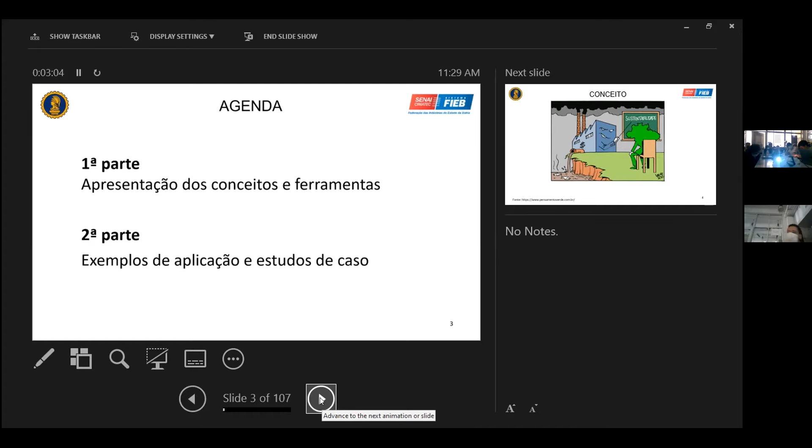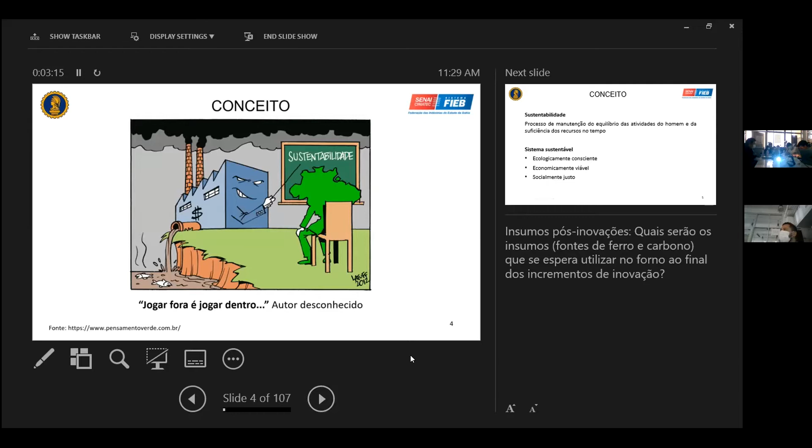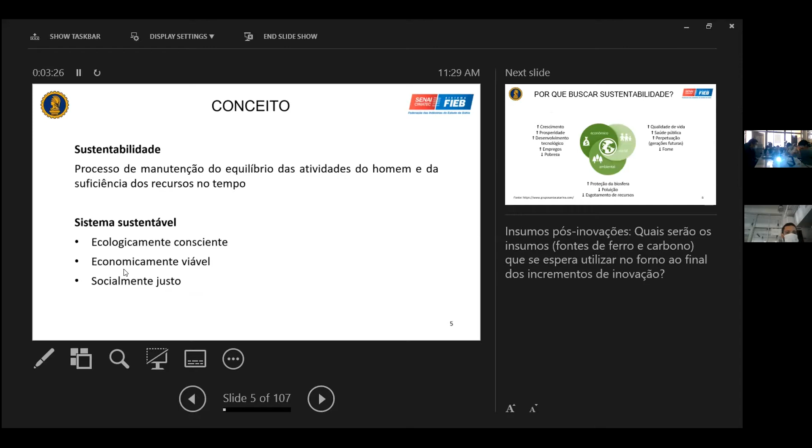What is sustainability? Environmental sustainability. Throwing things out means throwing things in, because we just have this planet. That sort of talk that you guys know. What is a sustainable system? It would be ecologically conscious, economically viable, and socially just.

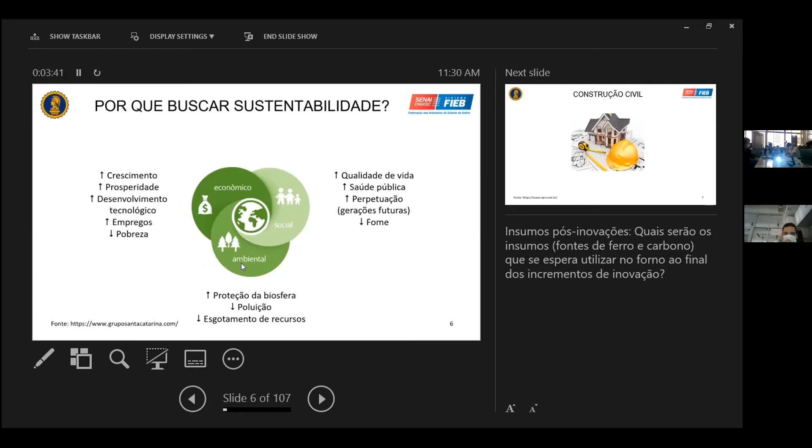Why do we look for sustainability in buildings? We have the three sides: this one here is the economic, this one here is the social, this one here is the environment. I'm not going to stay here for too long. For civil construction and civil engineering, we can have benefits on the prosperity of the society, development.

Sometimes I will pause a little bit because I'm trying to translate what I have here. Generating a place for people to work, enhance quality of life, public health, and decrease the number of hungry people, and protecting the biosphere. And what is this other one? Pollution and resource scarcity. We play an important role here, and we should think about that, because we don't do that naturally to the positive side. We do to the negative side. So we should think about this a little bit.

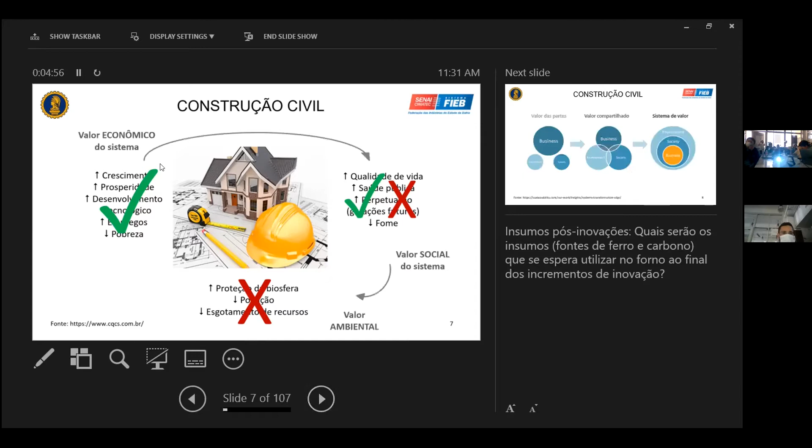So this is really good for the economic side. For the social side, we have some things that are positive, some things that are not that positive. And for the environment, most of the time we are not doing the best thing. So we should think about that. That's this big X here. So the economic value is here, the social value is here, the environmental value is here.

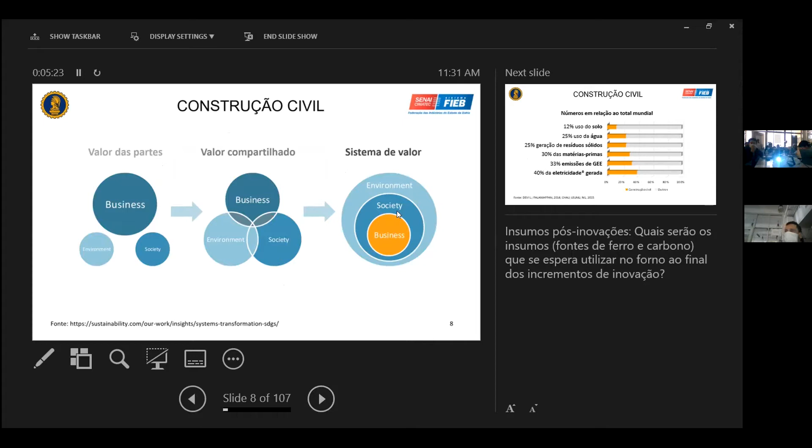And which is very important, we think about that because the concept of sustainability has been evolving, and nowadays we think like this: without us, which means society, we don't have business. If we don't have people, we don't have business. And if we don't have environment, we don't have anything. So actually, we are within it, so we need to care for it.

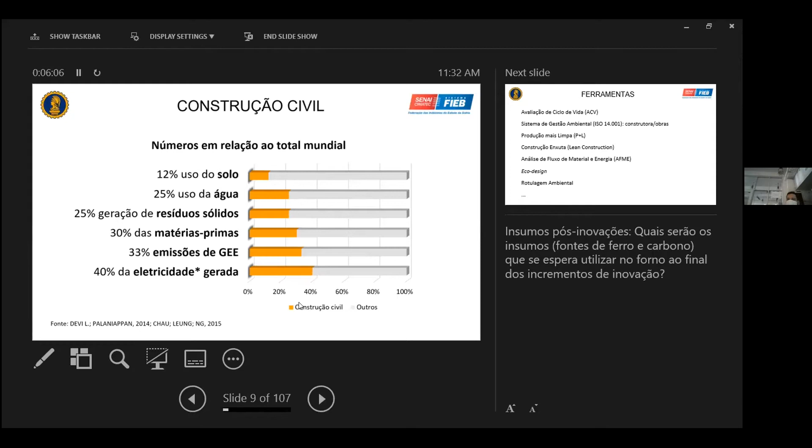A little bit about the major impacts of civil engineering. We use 12% of the soil in the world for anthropic activities - anthropic means made by human. 25% of the water, 25% of the waste generation is due to what we do. 30% of the use of resources, feedstock, and raw materials, 33% of greenhouse gas emissions, and 40% of the electricity generated. This is just us, and there are other sectors: agriculture, transport, energy, everything.

Some of the tools: life cycle assessment for us to try and analyze and manage this part of the engineering. This is a Brazilian standard here, but we have equivalents here in the US. One concept called cleaner production, lean construction - you guys probably have heard of it, but we are going to touch a little bit about it. Material and energy flow analysis, eco design. This one here, probably - anyways, those are the labels that we have in products, green labels. This is pretty much, I think, the translation.

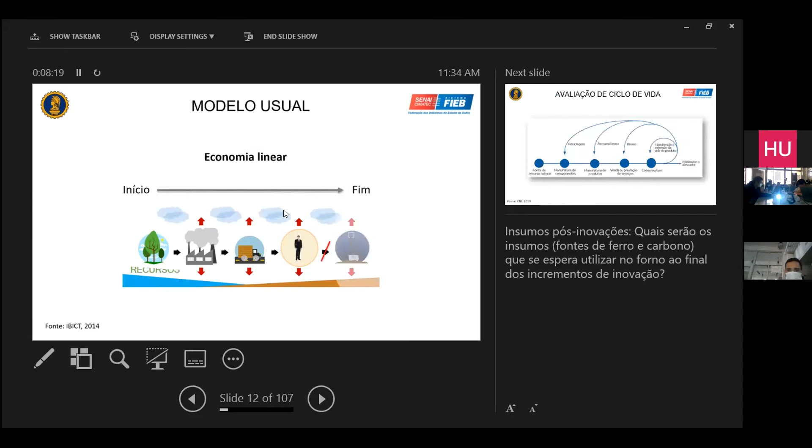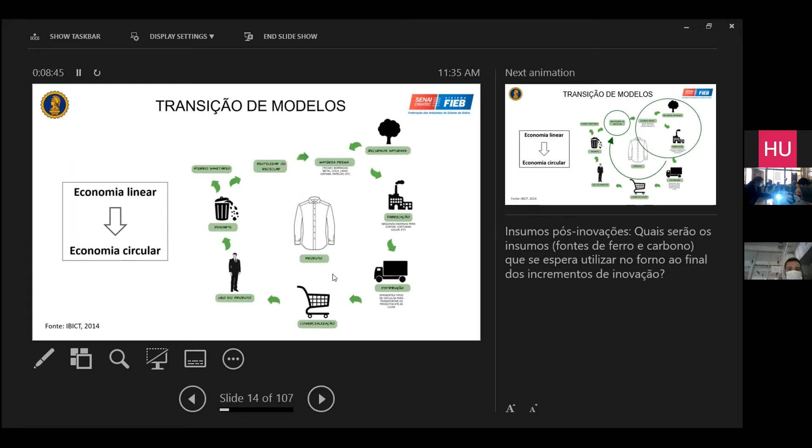So what we try to do here is circulate the economy more than think in a linear way. So recycling, remanufacturing, reuse, and all those sorts of things. Instead of doing this kind of circle and ending in the landfills, we try to keep the nutrients, the substances, materials going on in cycles. That's the main goal now. So yeah, this is the circular economy.

This symbol here is the institution where I did my master's degree back in Brazil.

Okay, so from the perspective of life cycle assessment, and I can help you guys a lot with this because it's sort of my background. So we have environmental aspects, which are the causes. It's not gonna be only about concepts, okay? We are going to jump to examples in a bit.

The causes are mining, agriculture, forest exploitation, production of electricity, water, transport, constructions, everything. This causes environmental impacts, which are the first consequences. So depletion of natural resources, pollution, and changing the land use, okay?

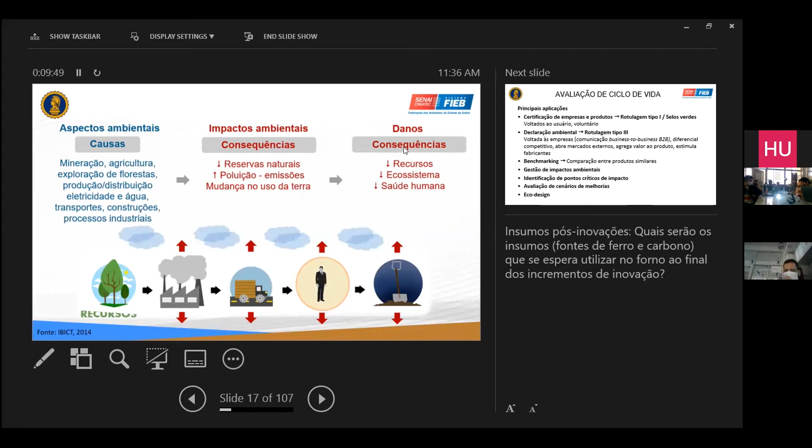And the consequence of the consequence, we call this damage. So first impact, in the second place, damage. Damage are - we are worried about the resources, the ecosystem, and human health, okay? This is like the framework of the life cycle assessment.

The same as we have in those products here that we can take in our hands. Probably we'll have some labels if it's plastic, saying that it's recyclable, saying that it's sustainable in some way. We have certifications for buildings. And this one is pretty known, right? LEED, LEED. Have you guys heard of LEED? We have many buildings here at UCLA that have the LEED certificate.

This indicates the degree of sustainability of edifications, of buildings, sorry. This certificate was created here in the US, but we have this being applied all around the world, including Brazil.

And we have like the normal, the silver, the gold, and the platinum kind of certificate. So these levels differ in how environmentally sustainable the building is. And what's our product? Our product is buildings and other types of construction, so including infrastructure.

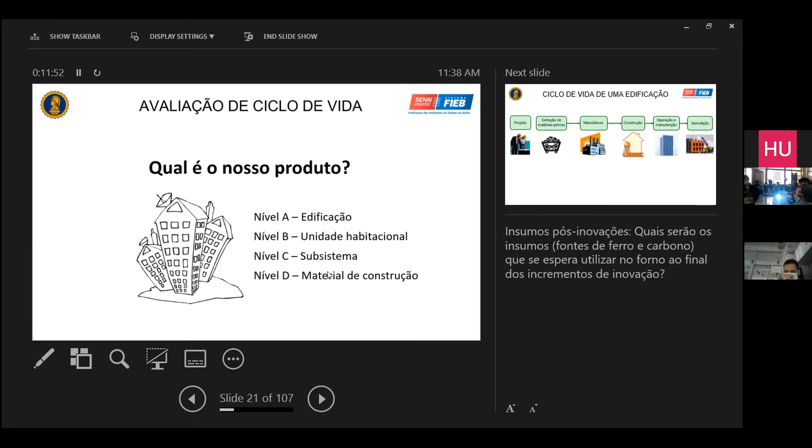And all the way through materials. So we can think of concrete, we can think of glass, we can think of everything. We can assess them from the environmental point of view. Okay, applying the general LCA, discretizing a system in stages, applying this to buildings.

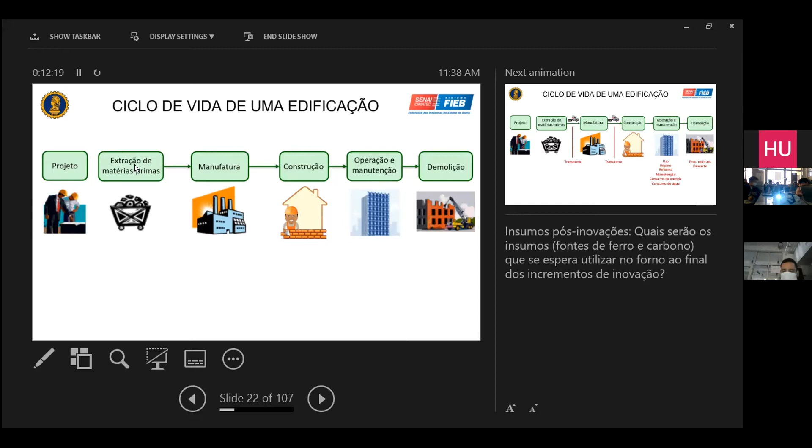So we'll have here the design, the project and the design, and then the extraction of feedstock and raw materials. It won't necessarily be in time, like chronologically before we extract. It's being extracted now, we are designing now, so it's gonna be merging somewhere. But yeah, the idea flow is like this.

Actually water we can kind of consume because we pollute it. And demolition, okay? So processing of residues and waste and try to recycle whatever we can. So this is conceptual phase, production phase, construction phase, use phase, and end of life.

If you have any questions, just interrupt me. I'm trying to go fast because we have a lot to cover, and I don't want to be here talking for 2 hours for you guys. I mean, I want to listen to you and discuss with you.

Okay, the engineering design versus eco design. So what is the goal of eco design?

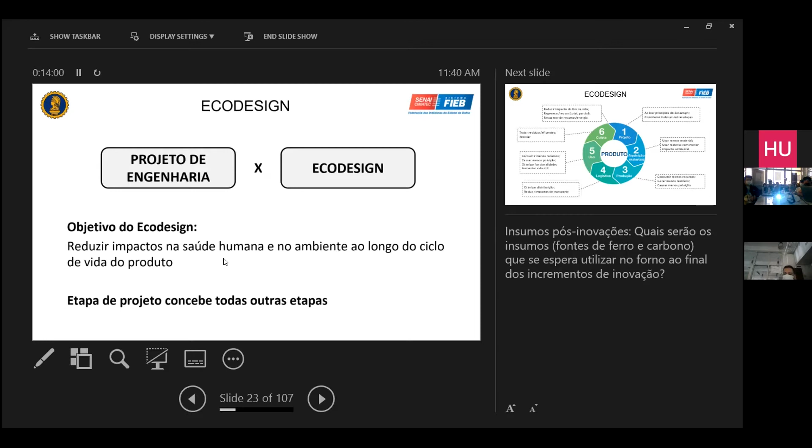It's like reducing environmental impacts and impacts for human health along the life cycle of a product, okay? And the design phase thinks about every other stage in the life cycle. Let's try to understand this circle here: design first, getting the materials, production, logistics (transport and everything), use, and end of life.

So we want to apply the principles of eco design here in the project phase and consider all the other stages. We have to think about them, because if we don't think about the end of life of the product, it's going to just end up in the landfill. I mean, that's the best case if we don't think about it, but probably it can go to the sea. We have this huge problem now that plastics are all around the ocean, right?

For the materials, we should use less material and use material that has lower impact. In production, use less resources to produce - so production efficiency, generate less waste and cause less pollution. In logistics, optimize the distribution and think of the impacts of transport - the closer we are from the source and from the user, the better. Use less resource here in the use phase, cause less pollution, optimize functionality, and enhance the service life. And treat residues, recycle in the end of the day, and try not to send everything to the landfill, okay?

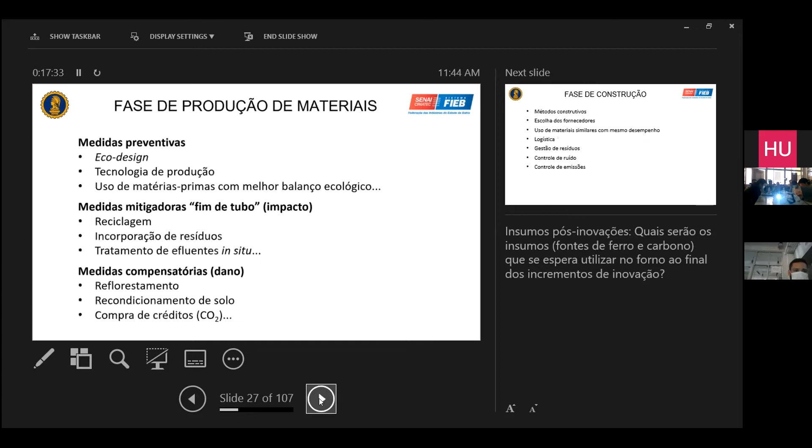So I got a question - aren't there a lot of constraints with rainwater reuse, with rainwater treatment, for a residence? How feasible do you think that would be to implement in our design project? Yeah, I think it's perfectly feasible.

One thing we need to do first in the design is separate the plumbing system - we cannot mix what comes out of the toilet with the gray water. So yellow water is water with urine, black or brown water would be water with the other thing. Gray water will be water from faucets and sinks, not including the kitchen, because in the kitchen we have organic matter, fatty acids, and all sorts of things. So we really want water from the sinks, water from the showers, and from laundry machines.

So first of all, we need to separate those, and then we can apply it. There are some pathways, some different designs we can apply, but mostly for a basic treatment, we want to use them for non-potable uses inside the building. For potable uses, we actually need drinking water, and to get from gray water to drinking water, it's better if we rely on the public system than try to do it at a small scale.

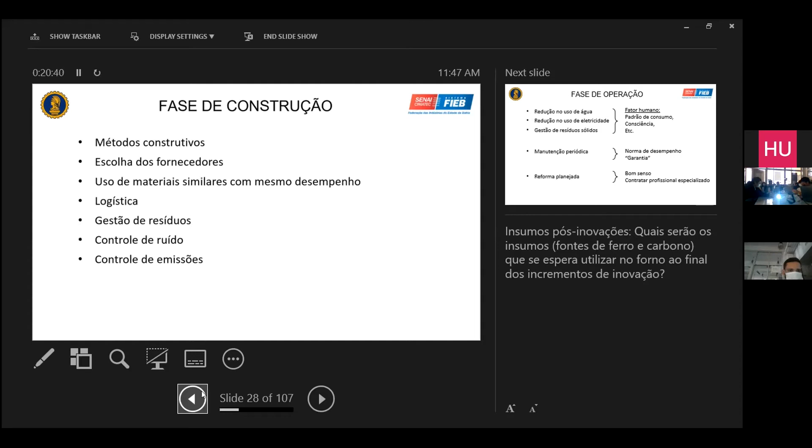Okay, lots of concepts here. Let's go. So how much do you guys know about recycling, upcycling, and downcycling? Does anyone want to try and provide us with a concept in a very concise way?

So I'd say recycling is just kind of straight up reuse for its original purpose or function. Upcycling is repurposing and almost upgrading it to something a little bit different, a higher level. And downcycling would be taking whatever product that is and breaking it down into its most basic materials or components to reuse it.

Yes, pretty much. In the sense of the origin of the word, it means repeating the cycle, and we aim to reduce the environmental impact. The one thing to keep in mind is whenever we recycle a material, it will start accumulating impurities.

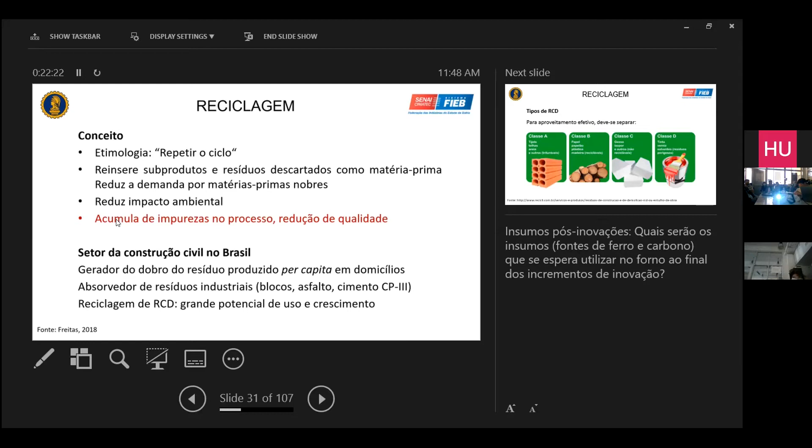So in the sense of repeating the cycle, probably for some applications, even for the same application—which means recycling—you probably need to invest some energy in processing because of the impurities accumulation. And as he said, upcycling tries to use something for a higher level function, while downcycling is using something that was once noble for a more commonly used material. So here I bring some examples.

If we have an old aircraft, we have two applications here: we can either use this steel to store food, or to produce a brand new Airbus airplane. So is this recycling, downcycling, or upcycling? Are those two options, taking steel from here...

The first one's downcycling, the second one's just recycling. But Airbus is never going to use recycled metal in their products, mainly because it loses the properties that are very important for this application.

For engineering, speaking about civil engineering construction materials—if you don't know yet, I'll tell you now—the whole industry relies on us to store their waste. There are millions or billions of research papers and theses focusing on how to store this kind of industrial waste in the concrete matrix, or in the ceramic matrix, or in pavements. So lots of industries rely on us to do that.

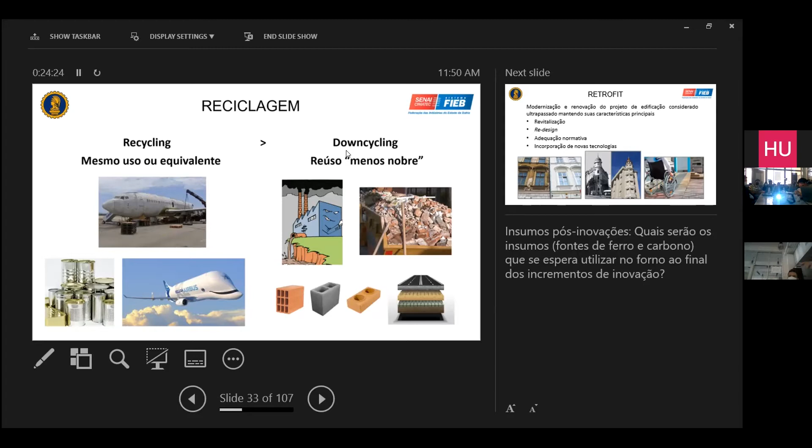So this is pretty much downcycling, because they're using some sort of material that had a purpose and now it's just immobilized in our walls. Anyway, this is only another way to look at it.

Retrofit means redesigning old things—refurbishing inside, incorporating new technologies, adapting for standards to be accessible. For example, if we have a construction made 50 years ago, the standards changed; now we are more worried about accessibility, so we could use retrofit to fit this kind of function in the facades, etc.

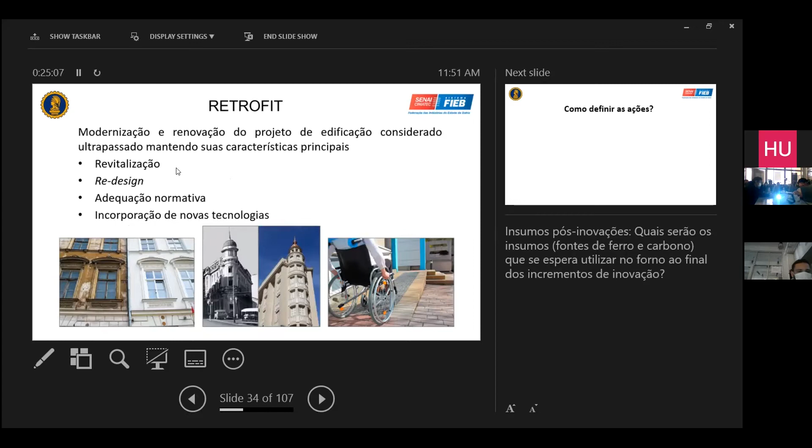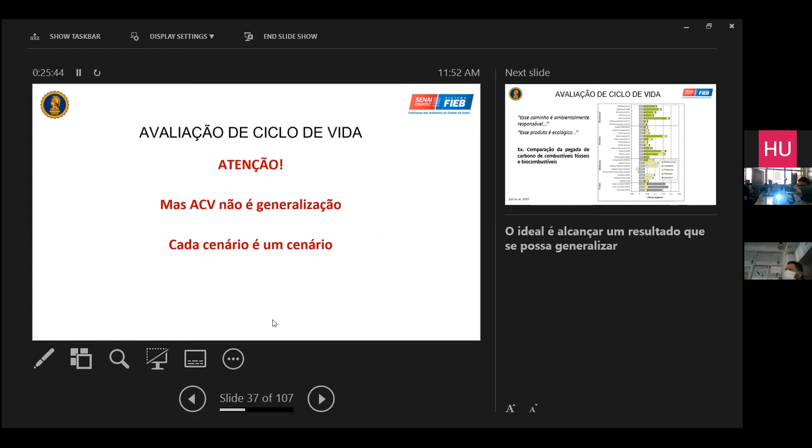So just so you know some of those concepts, one heads up: life cycle assessment is not a generalization, it's all about one scenario. If you do an assessment of a product here, it probably won't be valid for that same product being produced in Japan—the industry is different, the energy matrix is different, everything is different. So I don't mean to generalize here; we need to keep in mind that this is regarding some specific context or application.

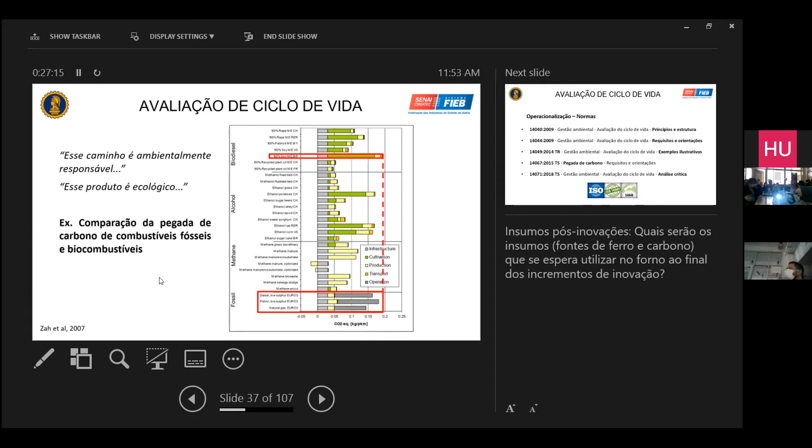Provocative diagram here. If I ask you, are biofuels more or less sustainable than fossil fuels for cars, for example? Probably everybody would say biofuels, right? But we have an example here that biodiesel from Brazil, from 100% soybean, has a greater carbon footprint than all the major fossil fuels in Europe. This is because of how we treat the soil in this kind of system. By changing the soil use, we are not capturing as much greenhouse gas from the atmosphere, and instead of keeping the cycle, we are just emitting. So this is accounted in the carbon footprint. In this study from about 15 years ago, our biodiesel actually has a higher carbon footprint than fossil fuels. This is only a provocation to say that not everything we think is sustainable is going to be sustainable. We actually need to calculate it, okay?

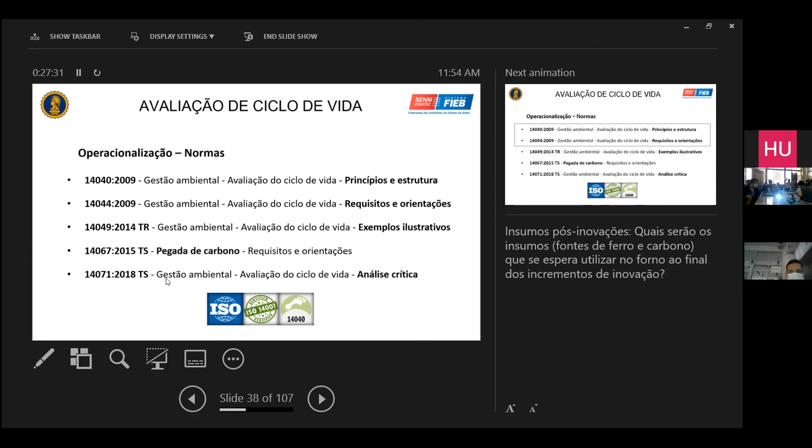These are some of the ISO standards for life cycle assessment, 14040, 14044 are the main ones, and many others. We have software to do those kinds of calculations. I know pretty well how to use SimaPro, but in my PhD I'm going to be using OpenLCA. This presentation is written in Portuguese, but if you guys want it, I can just email you. I don't really mind. I see Gavin here taking notes, but you'll have it if you want, I just don't have time now to translate it, though it's pretty easy to translate. If you have any questions, just reach out to me.

We actually have some life cycle assessment software for civil engineering for buildings: Athena Sustainable Materials, OneClick, eTool, Energy Plus. We have access to OneClick and Energy Plus through the Solar Decathlon competition. And this one, OpenLCA, is open source software, so it's all free and we can do coding if we know how. The United States Department of Energy also has a database.

So to do LCA, we need mostly one thing, which is data. Probably someone already did all the data gathering and analysis, for example, for the production of 1 kilowatt hour of electricity, so we're not doing that ourselves. If we wanted to do that, we'd spend like 30 years to do one life cycle assessment. So we rely on data that's already there. The database for our life cycle assessment is the most important thing, and the Department of Energy has its own database that we can use in OpenLCA. Probably by next year at most, I'll be dealing with this for my research group here, but I already kind of know how to do it.

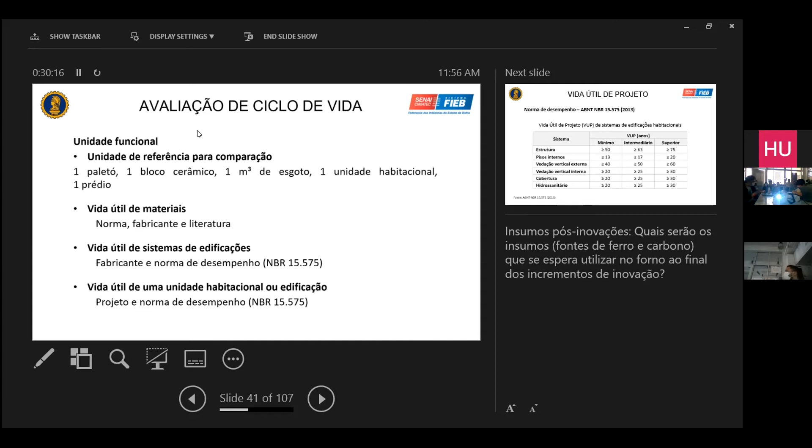To do life cycle assessment, we need a functional unit, as we say, 1 kilowatt hour, 1 kilo of concrete, one something. On the basis of this one something, we calculate everything else.

Some of the important impact categories in life cycle assessment are carbon footprint, and footprint meaning this kind of footmark, which carries the meaning that the thing you did before, that you don't see, you don't look back at, but it's there. So carbon footprint is CO2 equivalents. Does anyone know why equivalent? Because of other gases, yeah, pretty much. For each environmental category we have one environmental mechanism. Climate change is all about the greenhouse effect, and other greenhouse gas molecules behave differently compared to CO2. For example, regarding this environmental mechanism, one molecule of methane means like 25 to 30 molecules of CO2, so we can convert all greenhouse gas emissions into CO2 equivalents. Some greenhouse gases mean like 30,000 molecules of CO2. It really depends, but the main one is CO2, probably the second is methane, and we have a huge list of others.

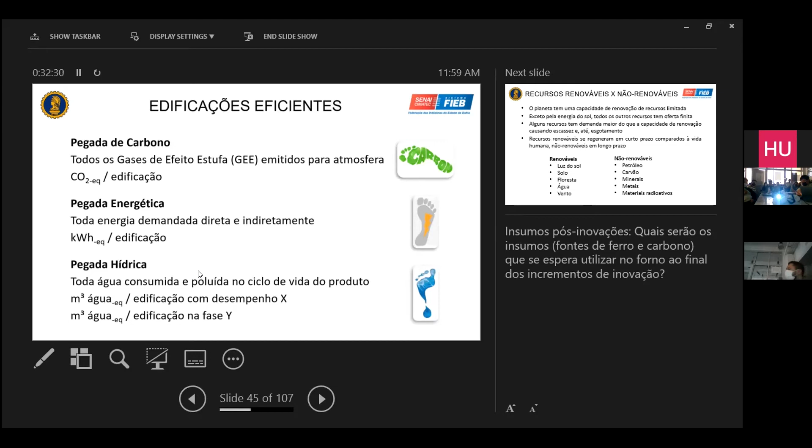Another quick question, and then we'll reach the examples. What is renewable and non-renewable? Anyone? Renewable means you can continue to do it indefinitely. Yeah, what else?

So it's pretty much the capacity of the earth to renew a resource. Renewable means it could be considered indefinite, like infinite. The sun will end eventually, in millions or billions of years, I'm not a physicist, but compared to our span of life, it's pretty much infinite, right? And fossil fuels are not.

We have a limited amount of fossil fuels, and it would take millions of years for the earth to produce them again. But with trees and the water cycle, they are pretty much renewable because as we go, the cycles run and they get renewed. So that's the difference: the capability of renewability compared to our span of life.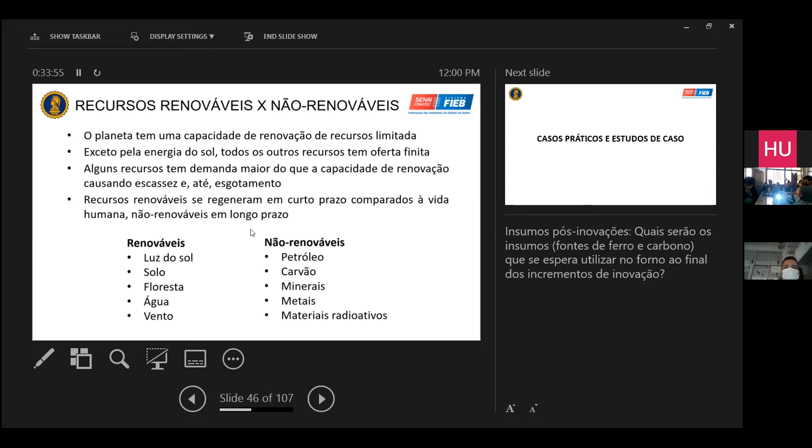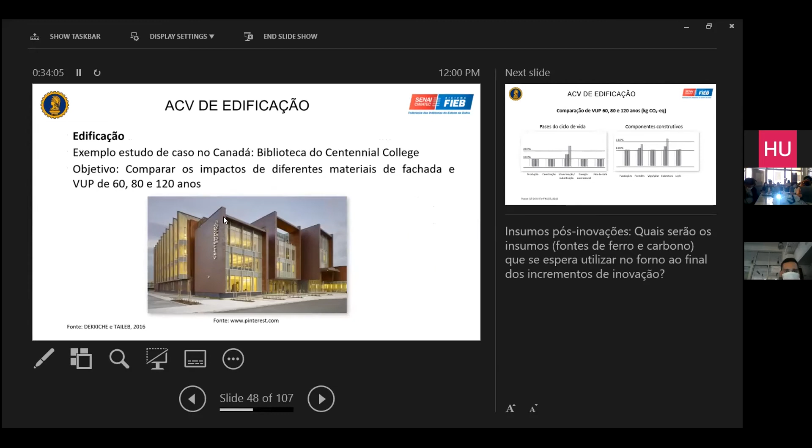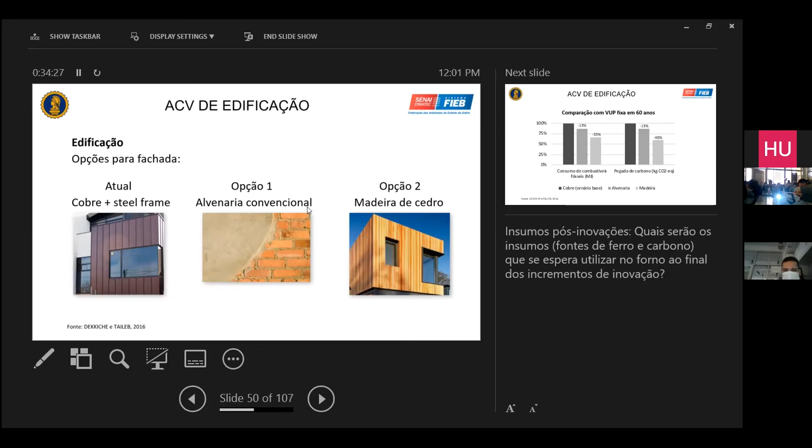Some examples here: these guys used LCA to evaluate this building, a library at a university in Canada. Their facade is made of copper and a steel frame, and they compared it to conventional masonry—what we call in Brazil ceramics and plaster—and another option, wood. They found that the fuel consumption and carbon footprint were lower for those alternatives.

This is pretty much what I said: when you have a trade-off between using this or that, we can try to use LCA to come up with an answer, on the environmental side.

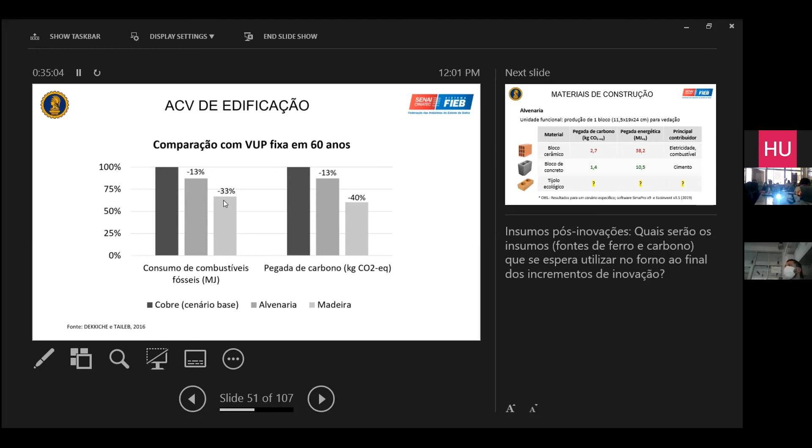One thing we cannot forget is cost. Engineering is all about cost—it's the first aspect we see, so we cannot forget about that. If it's too expensive, people won't do it unless we have standards and laws forcing us. Otherwise, we won't do it.

This is a study I have going on, and I'll probably invite you here—if everyone is interested in this kind of subject. It's pretty much stuck because I don't have the time. I was comparing ceramic and concrete block building units with what we call in Brazil—probably here too—ecological brick, which is soil cement brick. It can be used in very poor communities: when ceramics and concrete blocks are too expensive to build a house, you only need soil, a little bit of cement, and water. So this could be an option, and people call it ecological.

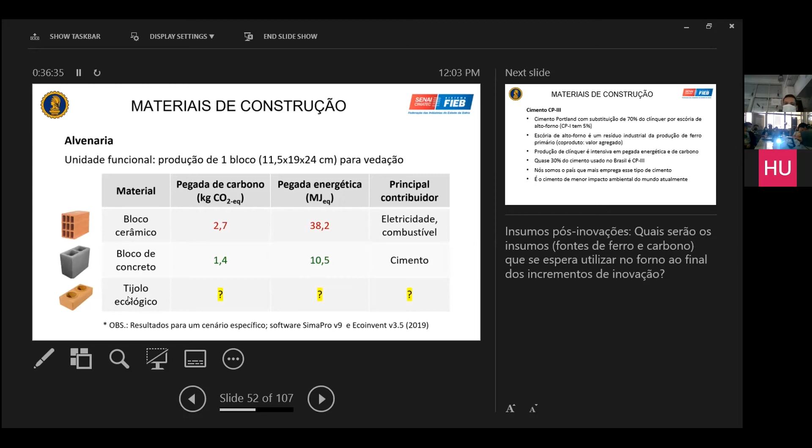Why ecological? Because when you're curing ceramics, you're burning biomass and emitting carbon dioxide to the atmosphere. They gave it this nickname because it won't emit directly—though indirectly it will still emit some carbon to the atmosphere. My question was, is it actually ecological? That's the driver of this study. I had all the data and some results already, but I didn't finish writing the article. So if anyone is interested, we can talk about this.

Do you guys know we have different cement mixes? We have Portland cement: CP1, which is pretty much clinker, and CP2, CP3. The CP3 uses blast furnace slag, substituting some of the clinker, and clinker is the main material. In concrete, the major carbon footprint comes from cement, and in cement, the major carbon footprint comes from clinker. So if we can substitute clinker, it's better for energy and carbon footprint.

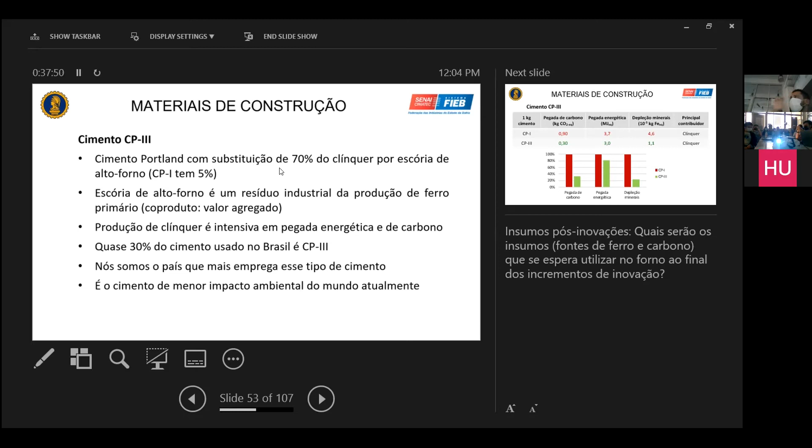Brazil is the country that uses the most CP3 Portland cement in the world, and it's actually much more sustainable than CP1, because we can substitute 35 to 70% of the clinker using blast furnace slag—which is just a waste product from industry. We know this is not, in the end of the day, the best option, but it is better compared to what we have today.

Comparing CP3 with CP1, we have lower carbon footprint, lower energy footprint, and lower depletion of minerals. These are results from LCA from our group—we did data gathering, treating, and then the LCA analysis, and these are the results here.

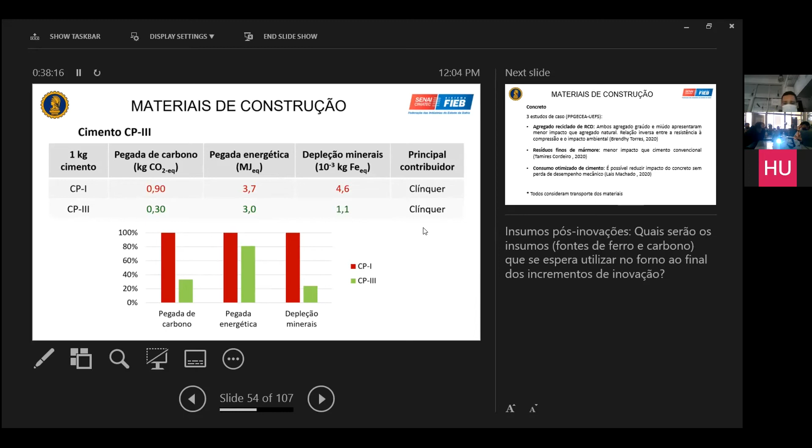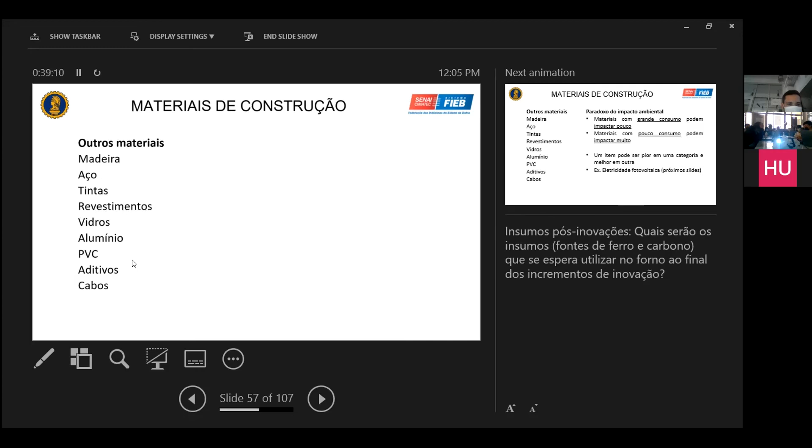We did lots of other studies trying to reuse marble waste, and we decreased the carbon and energy footprint of concrete, optimized cement use, and recycled old concrete in new concrete. We were actually able to decrease the footprints here. We can do that for everything, anything we can discretize in materials and energy coming in and out. If we can compile that information in the form of data, we can do those kinds of calculations, for wood, steel, inks, ceramics, glass, aluminum, PVC, whatever.

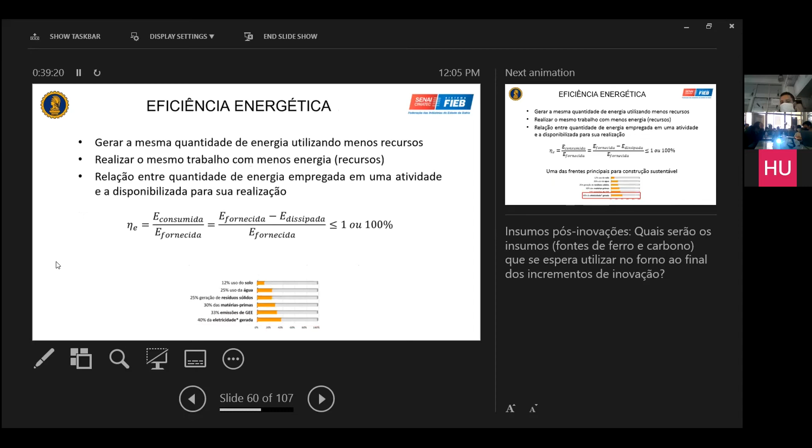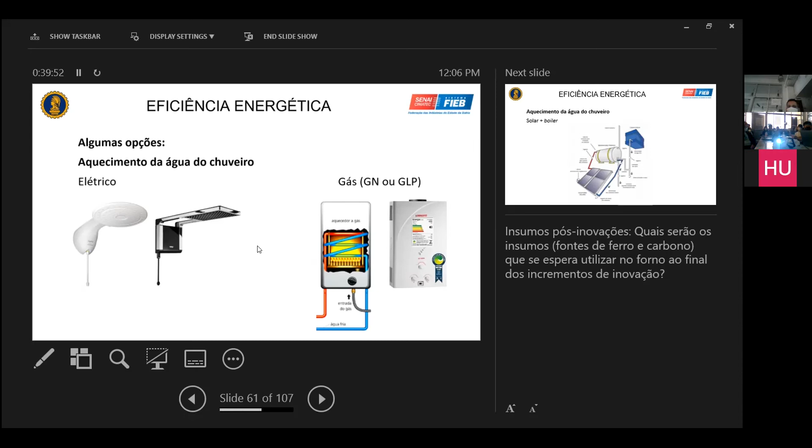This one here is just about energy. We have lots of electrical engineers here, so probably we don't need to spend too much time on it. Energy efficiency of buildings, we can do many things. In Brazil, we mostly use what we call an electrical shower, and you guys here probably use natural gas mostly, right? So those are fair options in Brazil, but you guys use mostly this one here in the US.

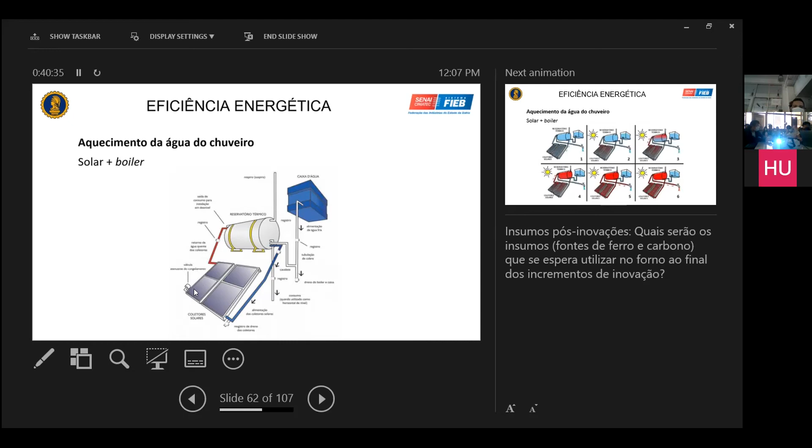We can also harvest energy from the sun in a system called solar plus boiler. This panel is not a photovoltaic panel, it's a water heating panel. We have it on the roof, and it harvests energy from the sun and heats the water up. At night, the boiler has a resistance that will turn on, so we never run out of hot water, but during the day when we have sun, it saves us some energy.

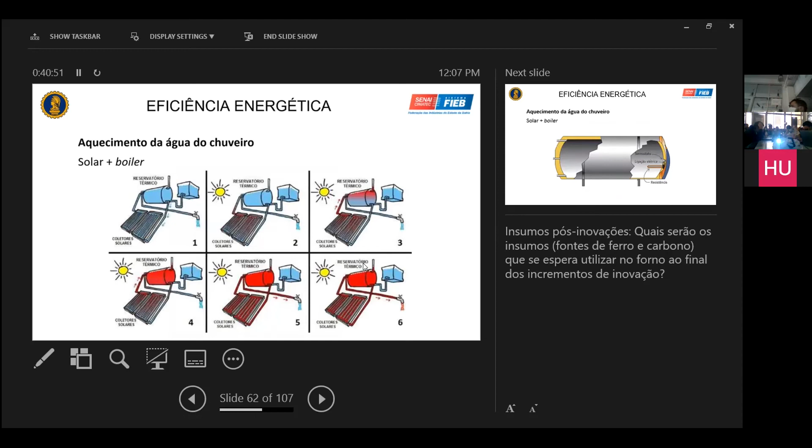This is pretty much what happens: it's cold here, it gets energy from the sun during the day, so we have hot water. During the night, we have the resistance. Did you guys understand this, if you didn't know it already? The resistance, the electrical resistance, is here, so whenever we don't have hot water from the sun, it turns on. In the end, overall, the energy use is lower, not consumption, use.

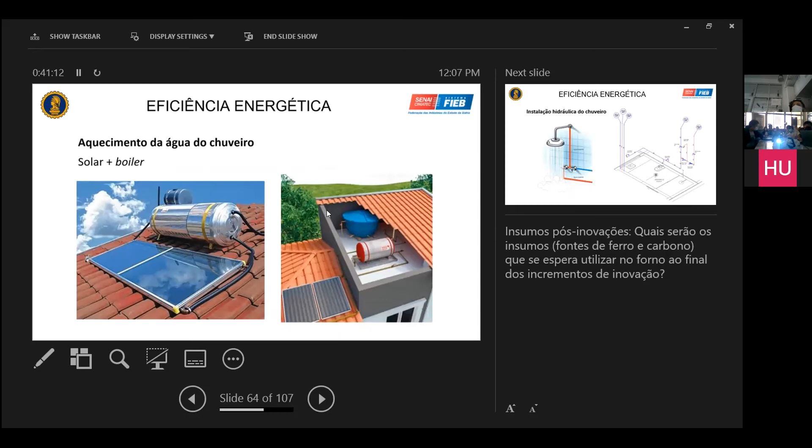This is an actual picture of it. Before doing my master's degree, I worked as an MEP designer, mechanical, electrical, and plumbing, but mostly plumbing, mostly water, and I actually did some of those here, like 100 or so. My brother has a company, my older brother is a civil engineer, so I always had something to do with him.

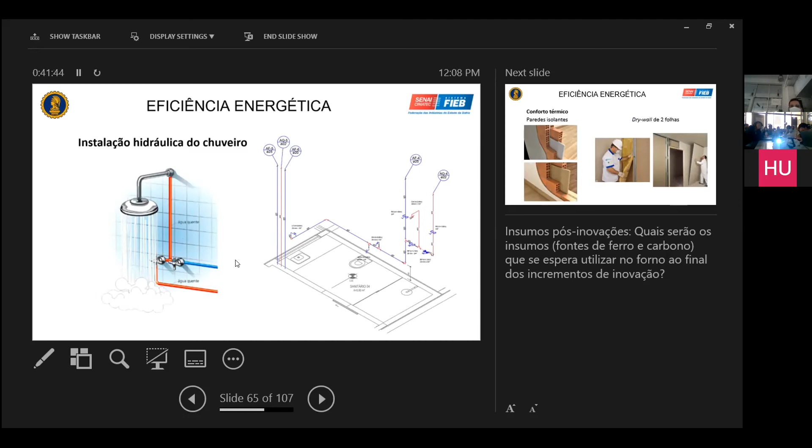As I was telling you before, this is just the separation of the plumbing systems. For hot water and cold water, we need to have separated systems, pretty obvious, right? For gray water, we'll need to do something similar. For thermal insulation, we'll have wall insulation walls. This is very used here in the United States, drywall, right? In between the plates, you'll have some sort of material for insulation, for acoustic and thermal insulation.

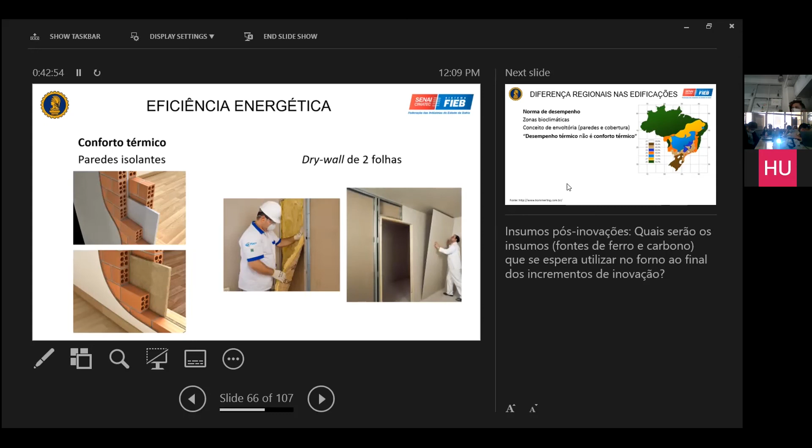This is an interior wall. Is there a reason you'd want to thermally insulate an interior wall, or is it just acoustic? I think probably both. If you have a business building with separate rooms, and if we don't have a central HVAC system, each one has its own, so we don't want to be transferring heat because it's inefficient. Also, if you have a room close to the windows and a room inside, we'll be transferring heat from outside to inside. So it really depends.

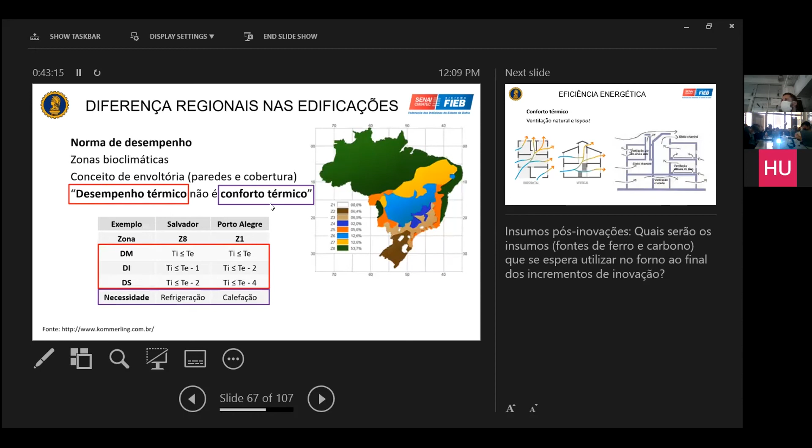We need to evaluate the energy transfer from outside to inside. This is only to call attention to the fact that thermal performance is different from thermal comfort, okay? Thermal performance means the wall won't let as much heat pass from one side to the other. Comfort means humans inside the buildings need to be comfortable, so sometimes we'll need HVAC, sometimes we'll need heating systems.

Like 40, so 40. Yeah, it's okay, you can record it in your view and then zoom. Just like 10 more minutes, I want to show the most important thing. Thank you, yeah, sorry about that.

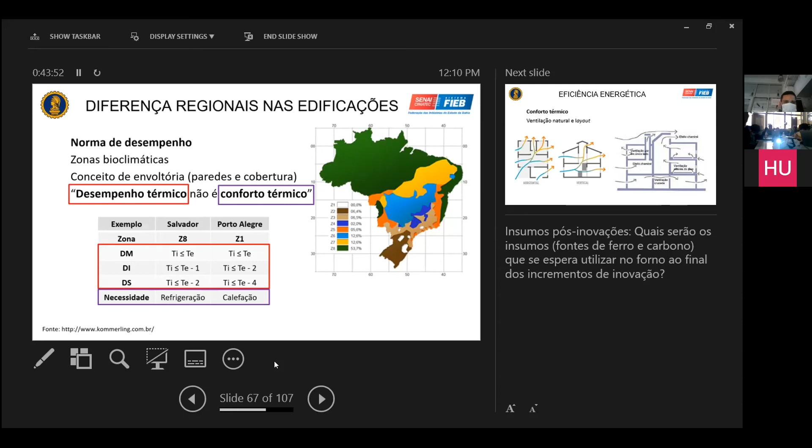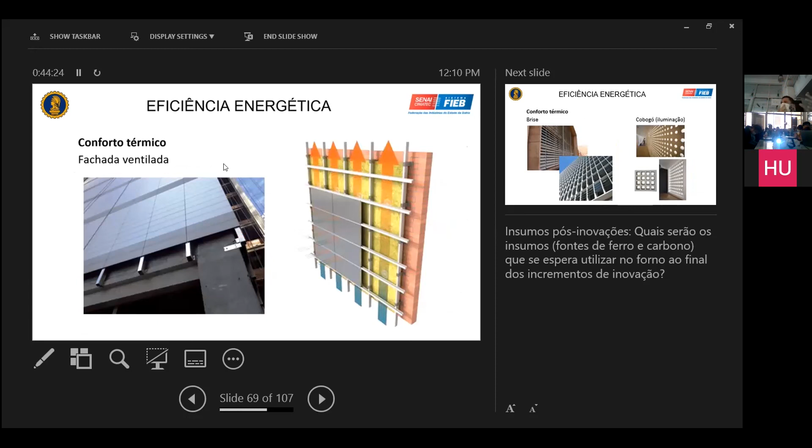This is energy efficiency. For architecture, we need to think about layouts, about natural ventilation. This one here is a ventilated facade: we have the facade, we have a glass, like what we call a glassy skin, and we have the possibility for air to flow from down to up. As it's going up, it's getting heat from the building and carrying it away.

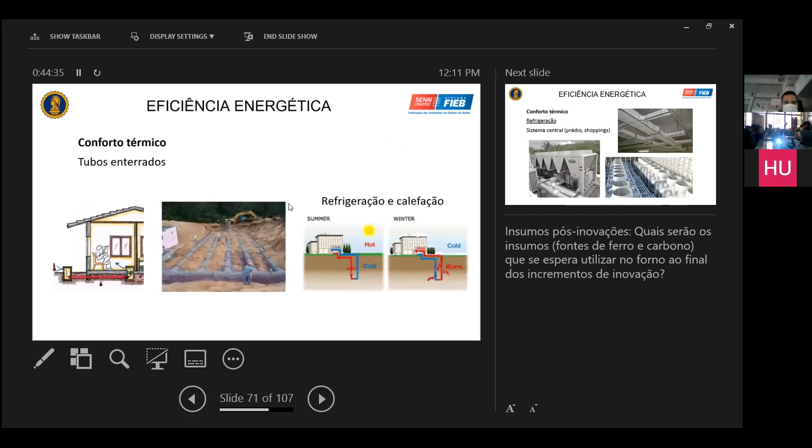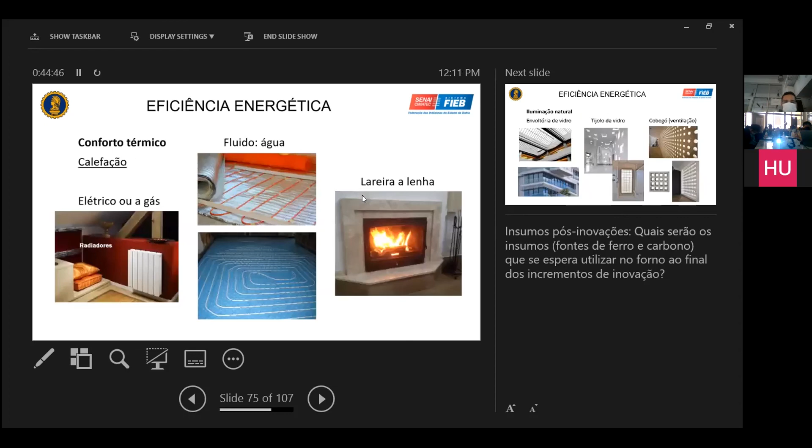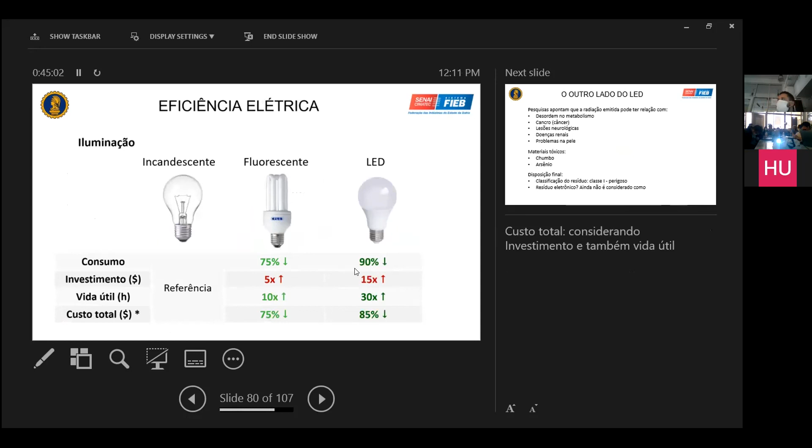Those type of things here that I don't know the name in English, but we actually have lots of those here in the UCLA buildings, right? Refrigeration and heating, HVAC systems, and this inverter is some sort of new technology that is less energy intensive. LED is better than the other technologies. One thing we are really struggling with is end of life, because it has some heavy metals that we need to take care of, so we need to keep that in mind.

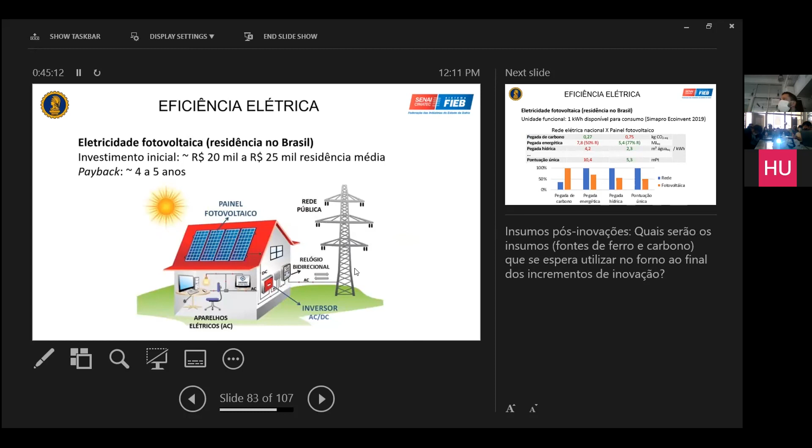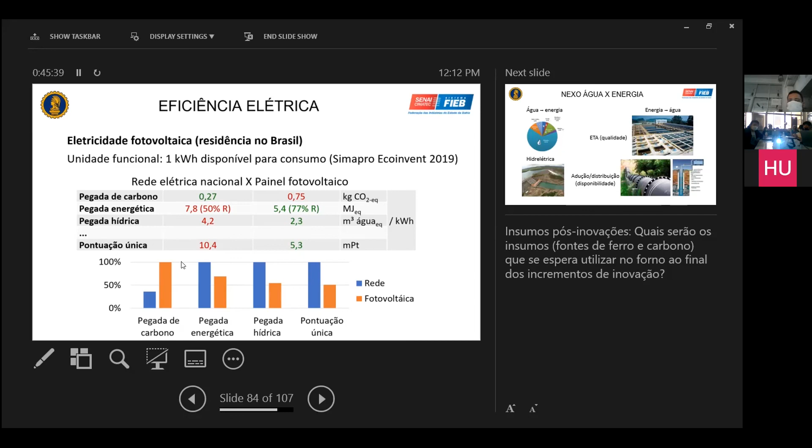Comparing photovoltaics to the regular grid energy in Brazil, there's some sort of trade-off. To implement photovoltaics it will be more carbon intensive than just using energy from the grid, but it will have a payback, like cost payback, probably 3, 4, 5 years economically. For the environmental side we have to calculate, but we have lots of articles on this.

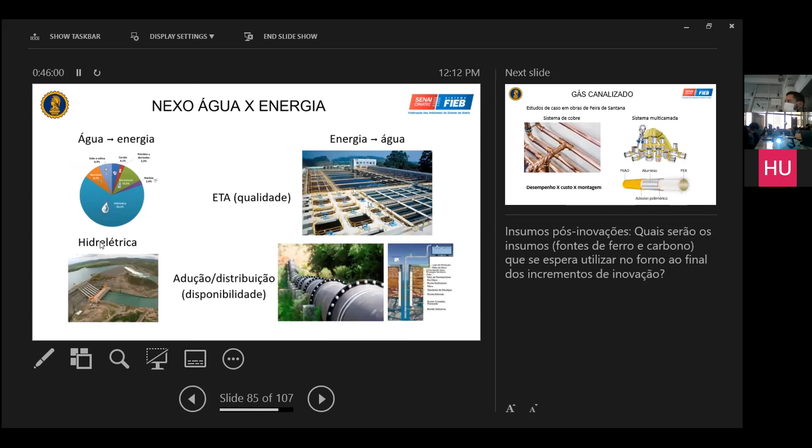Energy water nexus, just saying that to produce energy we need water. Some of our energy matrix is from hydroelectric power, and treatment of water and pumping water needs energy. So they are intrinsically connected.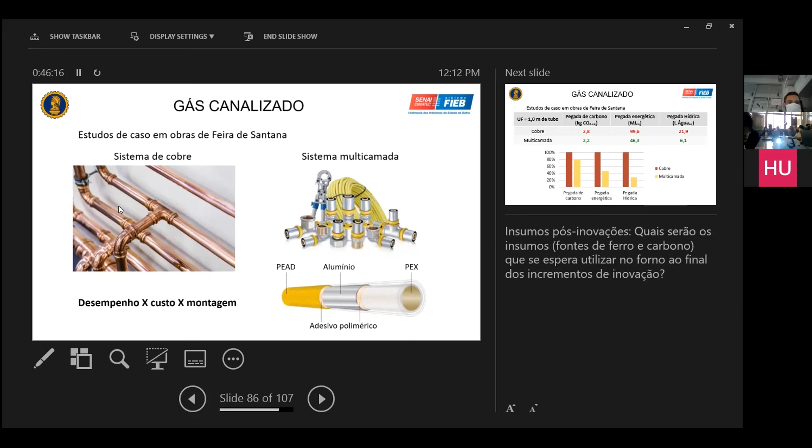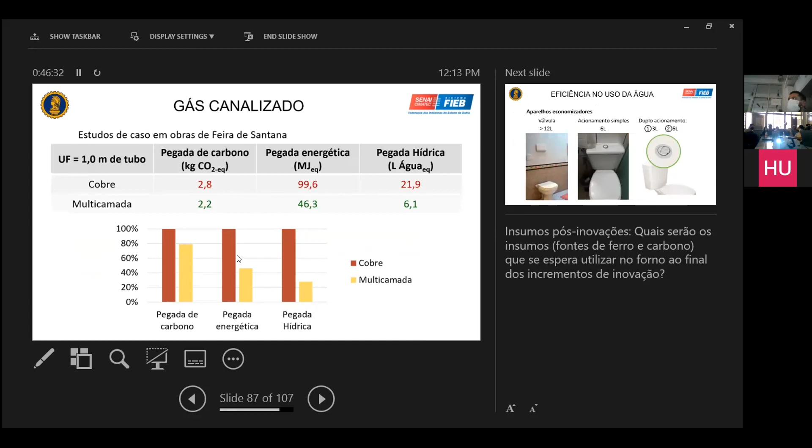This is another study that is kind of stuck. Anyone interested, we were comparing this new kind of material for gas plumbing to copper. We did all the data gathering and everything, and we need to finish it. It is promising, it has a lower environmental footprint than the usual one. We also didn't do steel, which is pretty much used in the industry, so we have room to do more things.

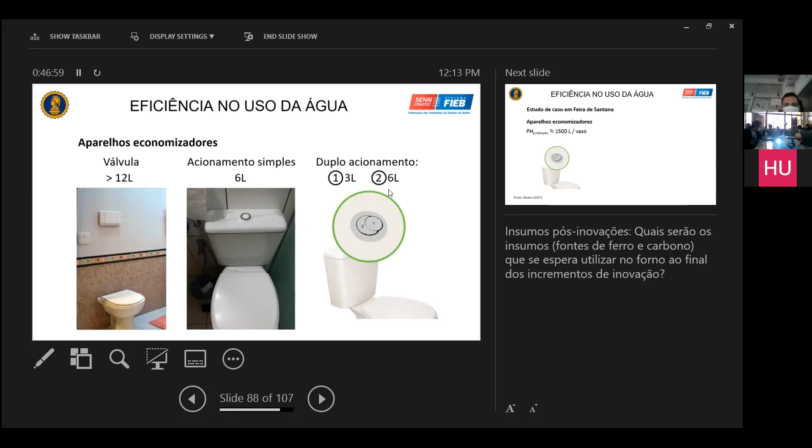This is the most recent one, and I'll finish here. In the previous meeting I was saying we also need to think of water saving appliances. This simple thing here has two buttons, one for number one and two for number two, you guys know what it is, and it will save like 3 liters of water for each flush.

We did the calculations here; these are brand new articles we are publishing. The payback for carbon footprint is 6.6 years, for energy 4.8 years, for water footprint 1 month. So all the water involved in the production of this toilet pays itself back in 1 month because of the water saving, and for cost it's 3 years, considering the money you invest and the money you save on water.

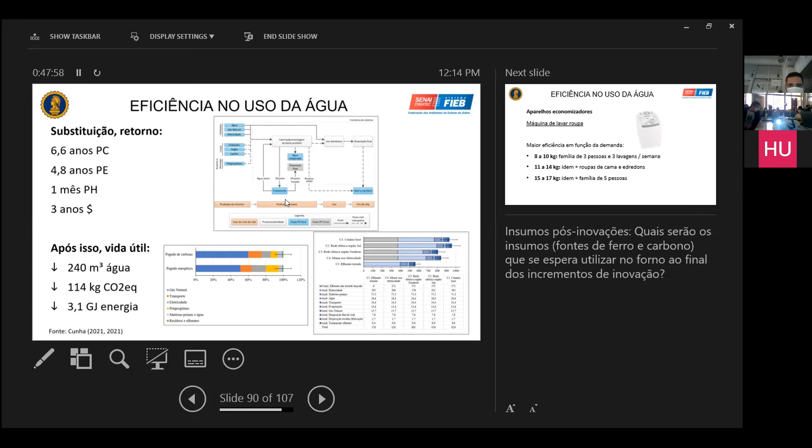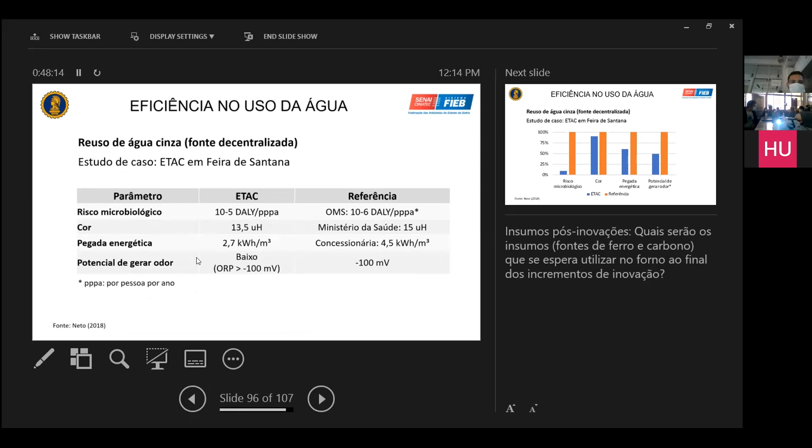I said this is gray water, I pretty much answered his question. For color and microbiological risk for human health, this is all proven to be okay to use for non-potable uses. And for rainwater harvesting systems, we actually also proved the carbon footprint is 40% less and energy footprint 50% less, if used for 25 years compared to water from the public system.

Does it depend on the actual rainfall in your area? Yeah, so here in LA there's not a lot of rain. Is it worth it? Yeah, definitely, this is for our case study. We actually have some rainwater there, much higher than here. As I said in the previous meeting, if we want to implement it we just need to know the site, look for the rainwater data, and compare it with the demand. This is a pretty simple calculation that can help you guys with that.

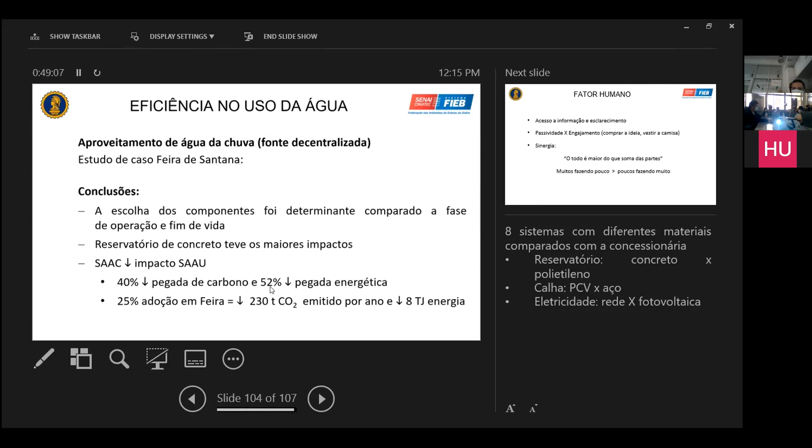Sorry about that, I was kind of late. This is too much information maybe for those who don't know about it.

I'll be happy to take questions after and help you guys whenever I can. Just a quick comment, I'm pretty busy with the PhD, but I really like the initiative, the project, so I will try to help you with whatever I can.